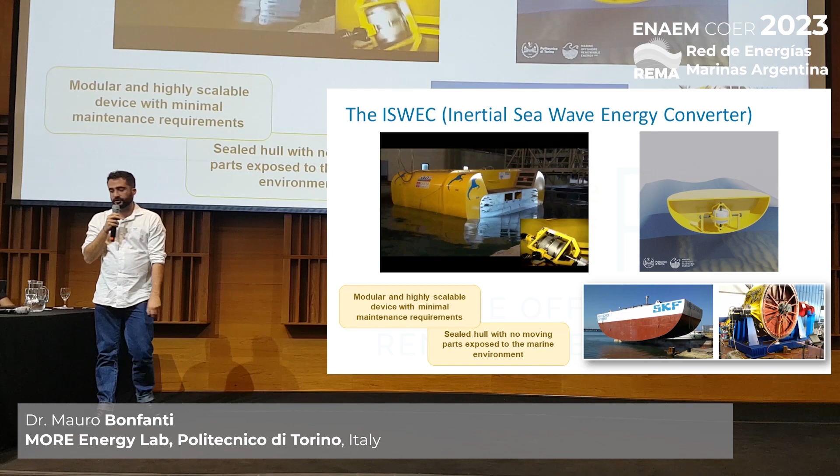And then we can also see a GIF of a concept with only one gyroscope. The full-scale device has two gyroscopes inside it, and you can see here the full-scale device deployed in Pantelleria almost 8 years ago.

So about the technology for the power conversion, ISWEC can implement a mechanical power takeoff. So it's basically a classic transmission with a mechanical gearbox and an electric generator, and then a more articulated power takeoff that is composed of a hydraulic converter, a control manifold with some valves, safety check valves, sensors, oil filter, and so on, with two filtering accumulators, a hydraulic motor, and an electric generator.

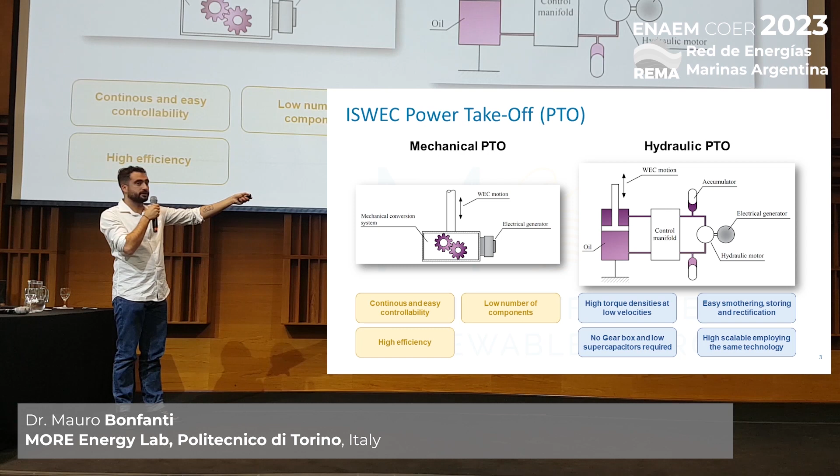These two power takeoff concepts have some cons and pros. Especially the hydraulic power takeoff can handle more powerful seas with basically commercial components. On the other hand, the mechanical power takeoff can enhance the controllability of the system, basically because there is no accumulation. So there is basically no coupling between the controllable part and the power extraction part.

So what about modeling? Professor John Ringwood introduced the modeling paradox a few years ago in his work, and we can have on the two sides of the box the frequency domain representation. So this is basically fully linear. We can derive straightforward control actions, control strategies, and it is easy to derive and very fast to simulate.

On the other side, we can see a general nonlinear modeling. So we have some linear components on the right of the equation, plus a generic nonlinear contribution, and as we can see, we can have different effects regarding nonlinearities, like viscous damping, mooring, and stop mechanisms for the power takeoff, some hard stops from the damping side, nonlinear hydrodynamics, and so on.

So, can we find a sweet point? Basically, yes. I don't want to confuse you with analytical formulation, but basically we can take the nonlinear term and derive an equivalent, let me say, linear representation of the nonlinear dynamics. That basically maps the nonlinear contribution in the frequency domain. Just wrap it into the linear contribution and then derive the linear transfer function between the wave force and the WEC motion.

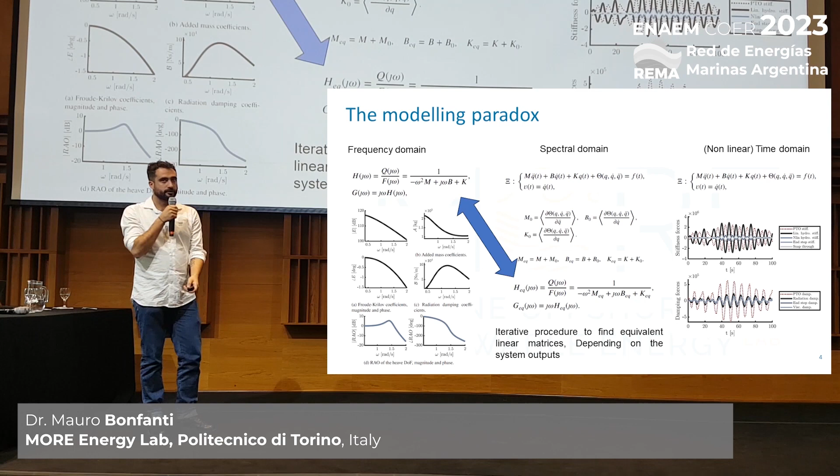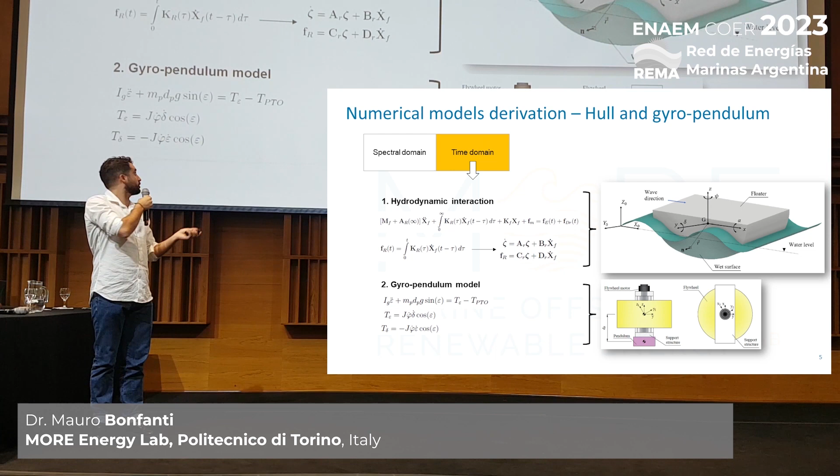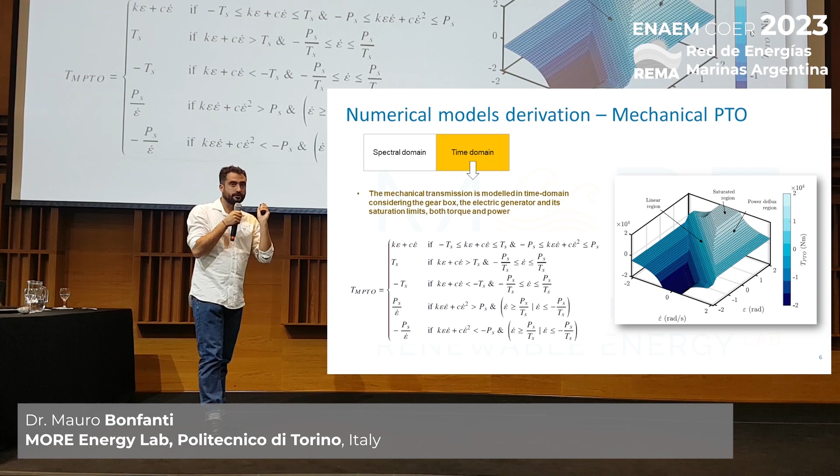So here is briefly the nonlinear equation of ISWEC. You can find, in this case, linear hydrodynamics, a nonlinear gyroscopic coupling, and a nonlinear power takeoff. Especially the power takeoff is kind of a mess because we have two kinds of saturation that work together. Torque saturation that basically limits the power takeoff torque acting on the gyroscope shaft, and then power saturation that limits the achievable power. So we can define a piecewise constant, non-differentiable power takeoff torque, and then with some cumbersome algebraic operations, we can derive a linear statistical representation of the nonlinear contribution.

Without going into details, as you can see, the linear contribution depends on the power takeoff parameters, so K and C, basically the linear coefficients depending on the power takeoff speed and power takeoff position, and then this huge integral that depends on the limits of your power takeoff. So it depends on the ratio between the power saturation and the torque saturation, and also depends on the motion, or to be precise, on the standard deviation of the motion of the gyroscope.

So as the standard deviation increases, for example, this original linear coefficient is decreased, just to account for the fact that the power takeoff is not able to give you enough power, enough torque. So just trust me, the analytical process is correct. And so you can see the spectral domain as a correction between the fully linear part of the power takeoff, that is basically the first relation, and the nonlinearities.

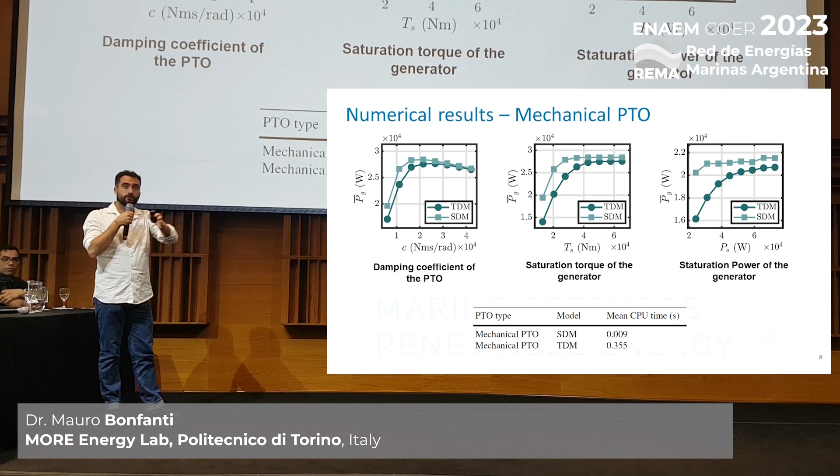The most striking result is that the spectral domain model is able to reduce the simulation time by almost 2 orders of magnitude, and I didn't report the frequency domain results, but basically you can imagine that the frequency domain doesn't take into account any power takeoff saturation. So the frequency domain basically can't see any effect of the saturation, and is only able to linearize the gyroscopic effect.

So now we have a linear representation of the nonlinear behavior of our system, and we can basically make some fancy control. So a new work by me and Nicola Faedo, one of my colleagues, is to wrap up the impedance matching principle into the spectral domain representation. I will be quick about this. The impedance matching is a kind of control that makes a feedback law that basically makes the system resonant in all the frequencies with respect to the wave input.

So we can derive the transfer function between the wave force and the WEC velocity, make some inverse operation and find the optimal impedance matching control transfer function. That can't be used in practice, so we just make a workaround. So we can basically interpolate the control transfer function in one frequency, like the work of Professor Ringwood, or something similar, and get an optimal single point PI control with respect to the WEC speed.

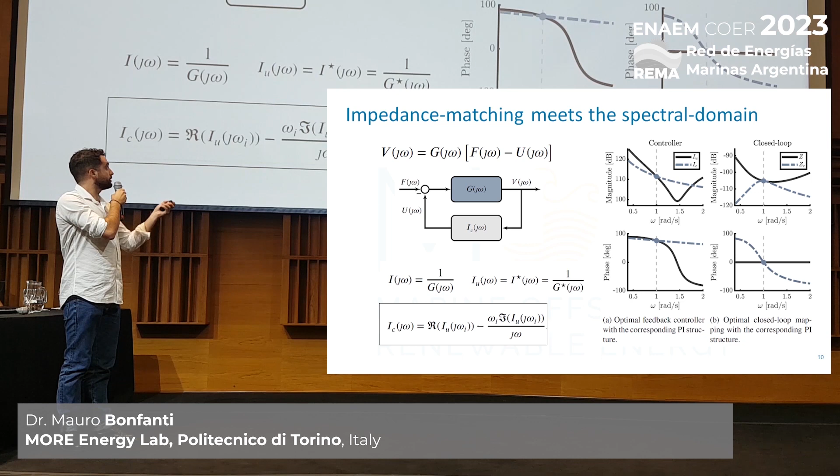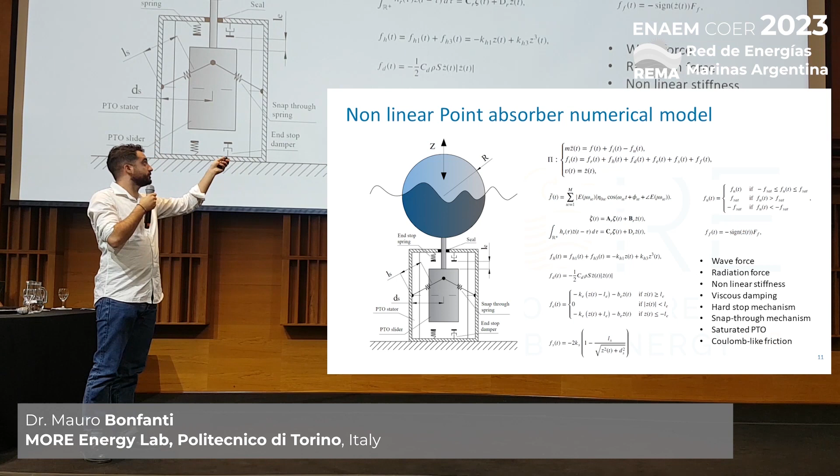And what we do basically, we use the frequency domain model of this plant, the spectral domain model, and the time domain one. So the operation was to find three control tuning methods in order to identify the PI control parameters. So basically, the control of the PTO is linear with respect to its position and linear with respect to speed. The linear part with respect to speed is used to extract power, and the linear part with respect to the position is to make the system resonant with the incoming wave.

So the three methods regard the use of the impedance matching principle with the frequency domain representation, the impedance matching principle with the spectral domain representation, and the last one is an exhaustive search. So basically, we can parametrically search each combination of alpha and beta just to find the best one that extracts the most achievable power. All these parameters are applied to the nonlinear plant. So we basically compare three different methods of tuning a PI controller with respect to the nonlinear plant. We test it with the occurrence table and energy table of Pantelleria, and especially in these three sea states.

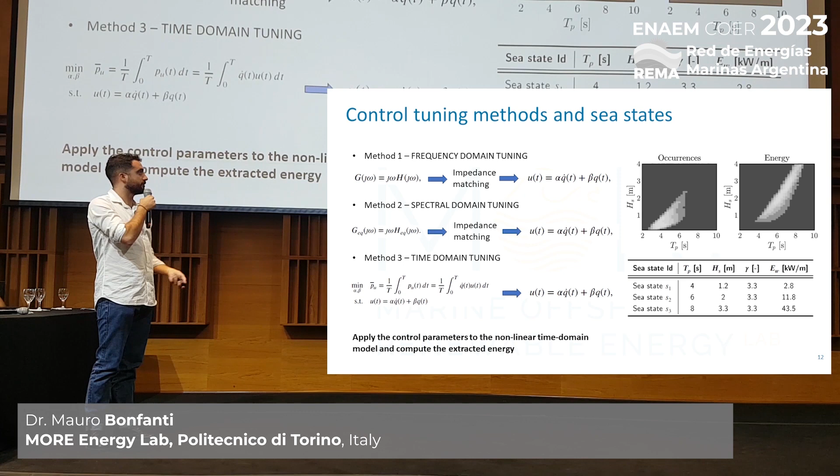So some results. As you can see, with method one, the impedance matching method tuned with the frequency domain model and applied to the nonlinear plant, we can extract almost 150 megawatt hours per year with a CPU time of tuning and simulating of about 0.022 seconds. The second one regards the use of the spectral domain to derive the PI controller. So as you can see, the power extraction is remarkably improved because, since the spectral domain can map the nonlinear behavior, synthesizing an impedance matching based control with the spectral domain representation is more accurate than using the frequency domain one, and the CPU time slightly increased.

And then we can see that, of course, the best power extraction comes from an exhaustive search that takes a lot of time compared with method 2. So the third method concerns, again, an exhaustive search. So I try for each wave almost any possibility of alpha and beta, and I pick the best one. And, of course, this method takes a lot of time.

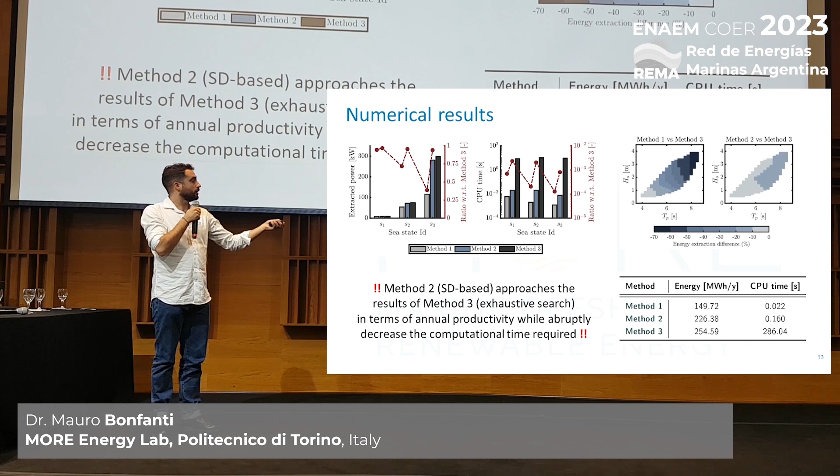So basically, the spectral domain is useful to simulate the system with a certain degree of accuracy with respect to the frequency domain, but most importantly, reducing the CPU time. Moreover, we can use the spectral domain to synthesize an almost optimal control, bounding the time again.

So just leave you a couple of publications. The message that I want to deliver with this presentation is that the design of WECs is becoming as holistic as possible, so considering all the factors of the process: the mooring system, the power takeoff saturation, the power takeoff cost, the hydrodynamics as non-linear as possible. So to better improve the LCOE, we have to approach the design of WECs in a holistic view.

With a holistic view, we have like billions of combinations of your design parameters, so you have to cut off the simulation time with a viable numerical tool and optimal control strategy. Yeah, that's all.

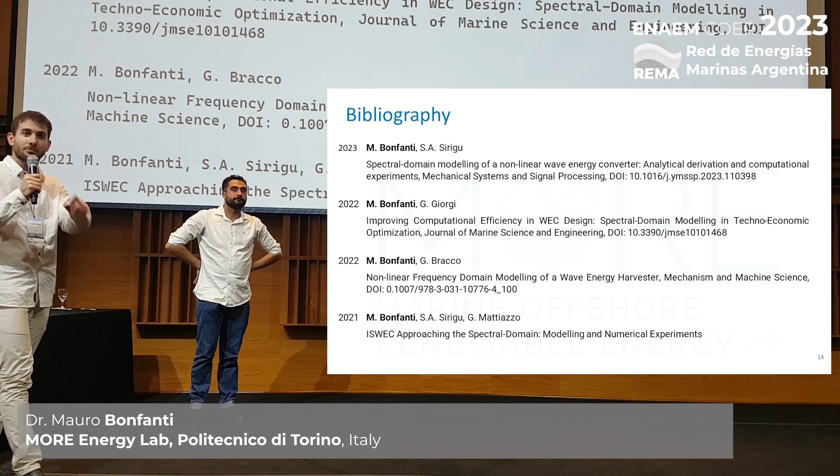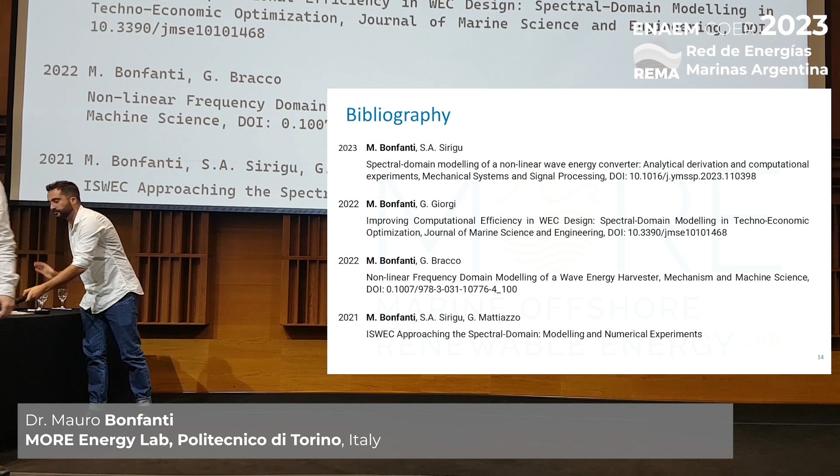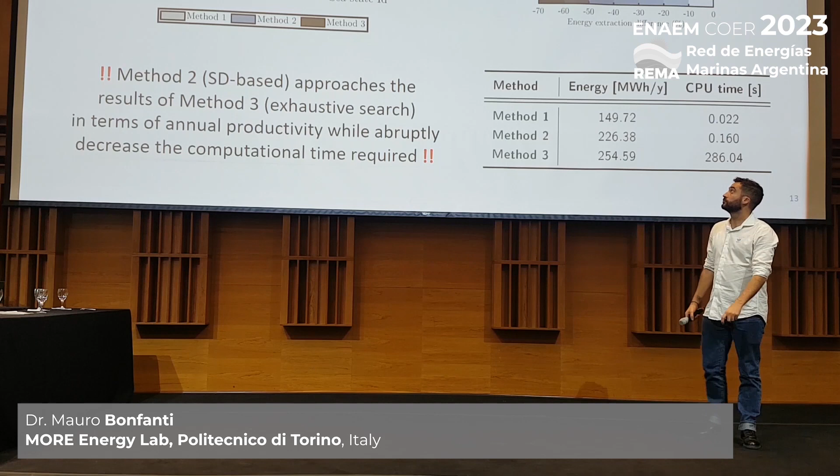Thank you, Mauro. Taking a look at one of the final images that you put there, I was wondering how you connect the great power that you can extract with these new methods compared to the sea state that you're analyzing? Because I can see that in sea state S2, the extracted power is rather... I don't know if you can mention something about that.

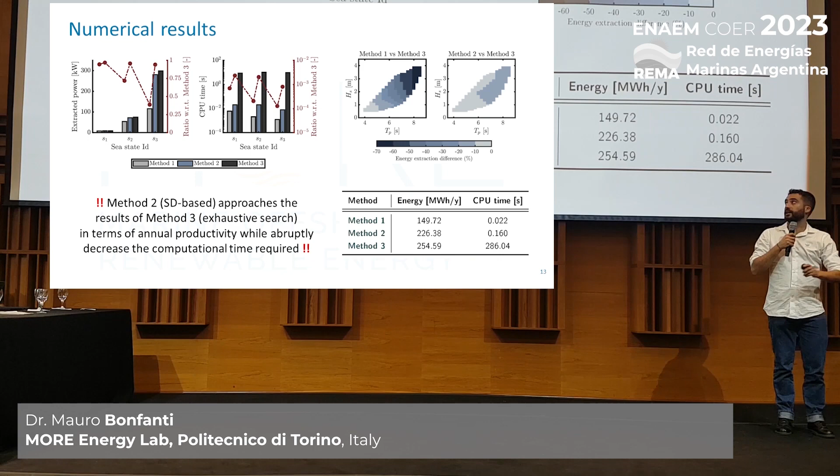I'm not sure if I understand correctly, but basically the first chart refers to the power extracted with respect to the three sea states I showed here. So it's just three single sea state examples. The right axis, colored in red, represents the ratio between the power extracted with method 1 and 2 with respect to method 3. So as you can see, method 2 approaches method 3 in power extraction, and is able to reduce the computational time by between three and four orders of magnitude.

The left chart is just three example waves, which are then re-simulated in the whole scatter table, and the right chart represents the global energy extraction difference between method 1 and 3 and between method 2 and 3. I don't know if I answered you.

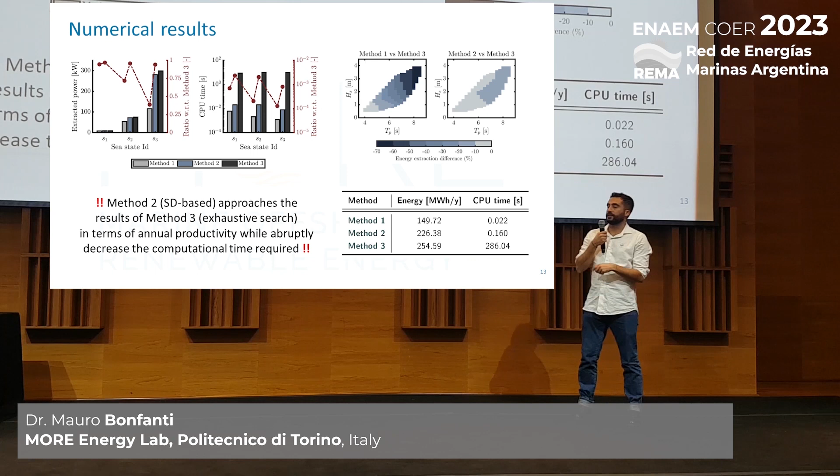No, but the point is that if you look at the extracted power in sea state S2, there's not much improvement when you compare every model. Instead you have a great improvement in state S3. Is that correct? You mean that there is not a lot of improvement using method 2? Exactly. So what can you say about that? Method 2 is not optimal. I'm sorry, not the method, the sea state. Because you have more power when you change the sea state. So how do you link the sea state that you're using and the behavior of the control?

Okay. As the sea state becomes bigger, the nonlinearities increase. So method 2 becomes less accurate, because the nonlinear effect gets bigger, and then the spectral representation loses accuracy.

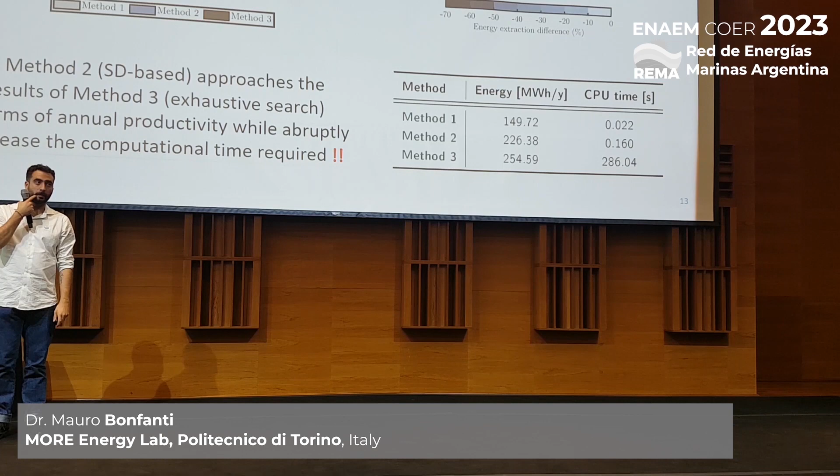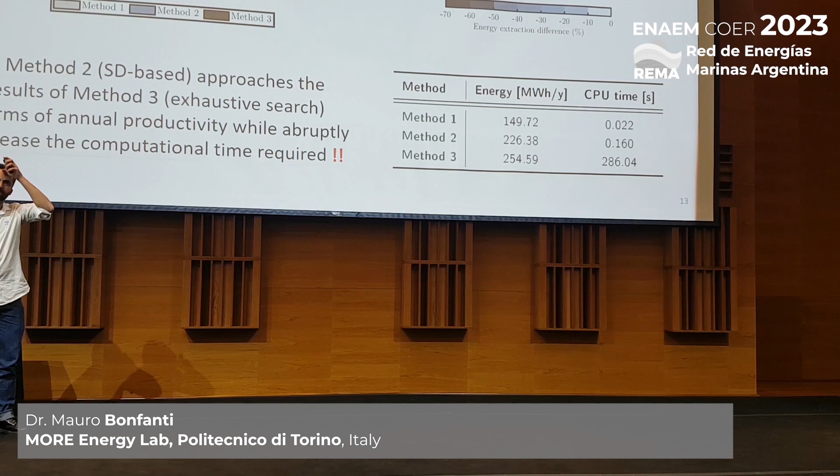Okay, so you fit the distribution to a Gaussian. Yeah, I suppose that the sea state can be represented by a Gaussian distribution, and then I derive under the Gaussian assumption. But you're not constrained to the Gaussian distribution.